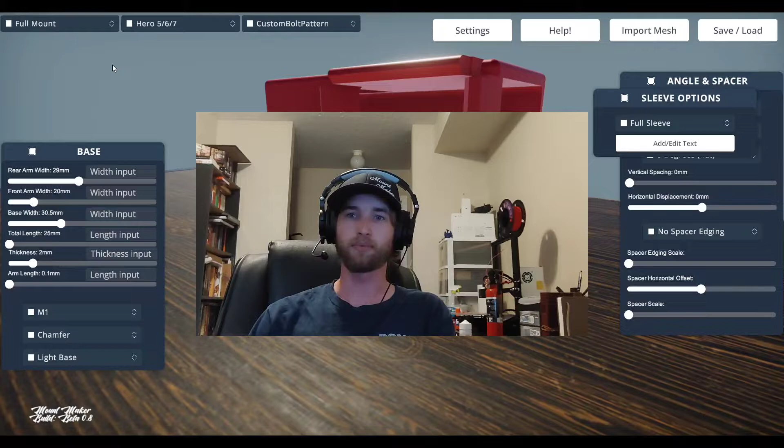We'll start with the small stuff and work our way through the list of the bigger stuff. I'm going to make a more in-depth tutorial video as well to go along with this for a couple of the features, but we'll talk about that in a minute. Starting from the small stuff.

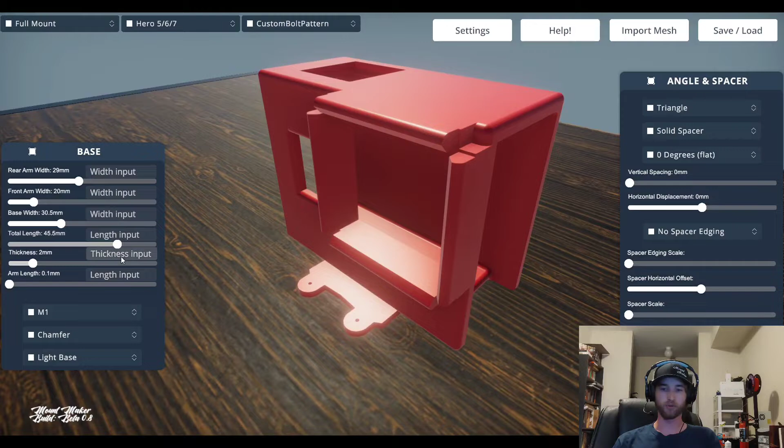Alright, I know a couple of you run some rather large quads and you were asking for M4 bolts. So M4 is now an option. They are massive, but it's an option now.

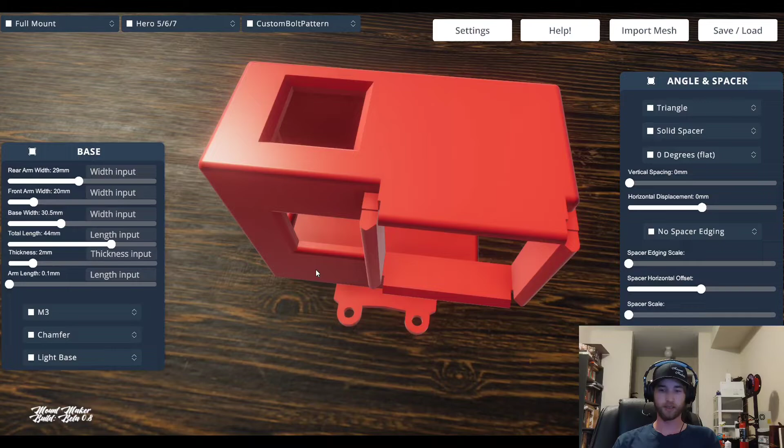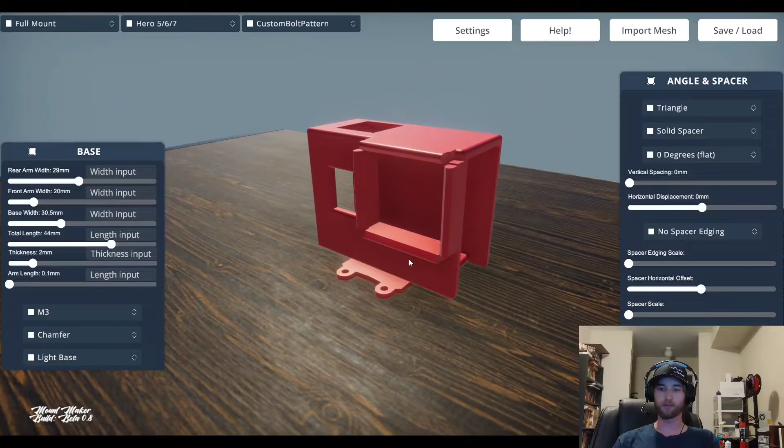Cameras. I know the camera was getting kind of annoying for some of you. I have plans in the future to further fix this and streamline it, but for now, I've turned off collision checking for it. That means it won't clip inside the mount when you're scrolling by and zoom in real stupid like. The downside is it also doesn't check for collisions under the table. So it's a bit of a trade-off, but the way I see it, if you're going this low, you probably don't care if it goes under anyway.

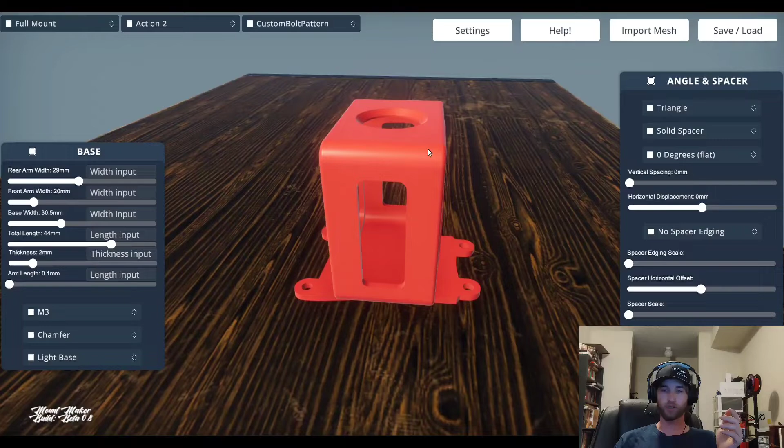Alright, I fixed up the DJI Action 2 mount. I know some of you were having issues, especially with the ND filters, where you could see the borders of the mount on screen. That's definitely not ideal, so I went ahead and chopped back the little lens bumper, I guess you could call it. I did this with all of the variants, but the one in question was actually this side mount ND filter one.

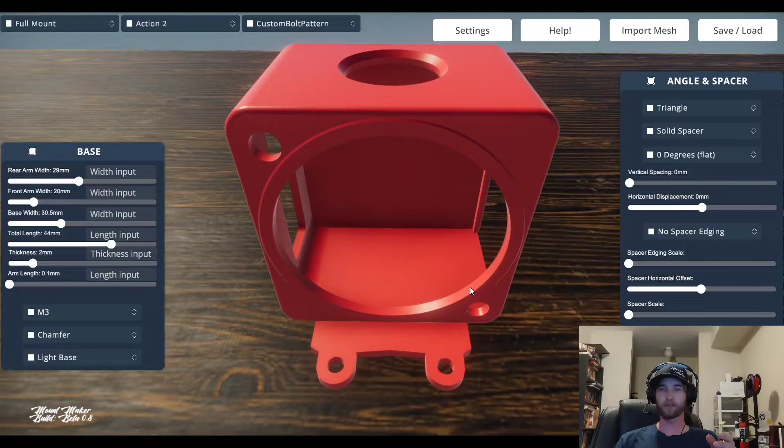So hopefully that fixes the problem. If you guys are still seeing edges of the mount in your camera view, please let me know. Best way to get a hold of me is through Facebook Messenger on the MountMaker page. I'll respond to that, I see it pretty much immediately. Email works pretty good as well, but yeah, let me know if this fixes the issue or not. I hope it does. I'm happy to rework it again if it doesn't.

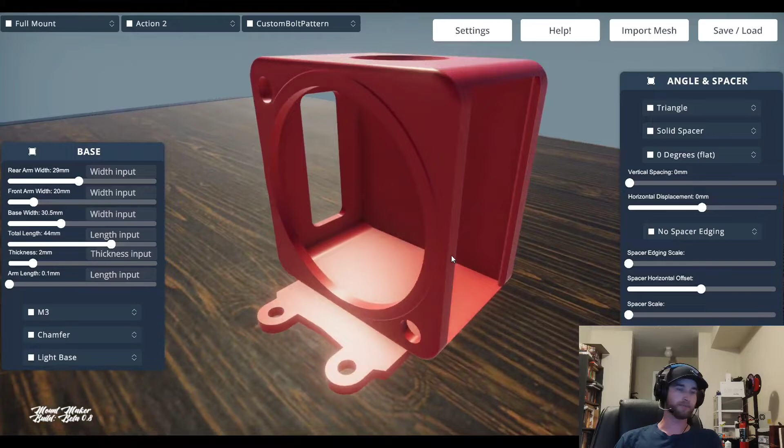Moving on, I started working on the ability to scrub through and change up what we're doing for the bottom mounts there. I'm not fully sure where I'm going to go with that, but I think the ability to have prefabricated mounts, just like prefab cameras, could be quite handy, especially for some of the really weird drones out there, like the Cinerace 20, which has a mount that's basically impossible to make in this. I'll get to a solution for that soon as well.

But for the meantime, I started working on a menu system that I've had a placeholder for a while. The only one I've added so far is the DJI FPV base. So there you have it, this will work with the DJI FPV.

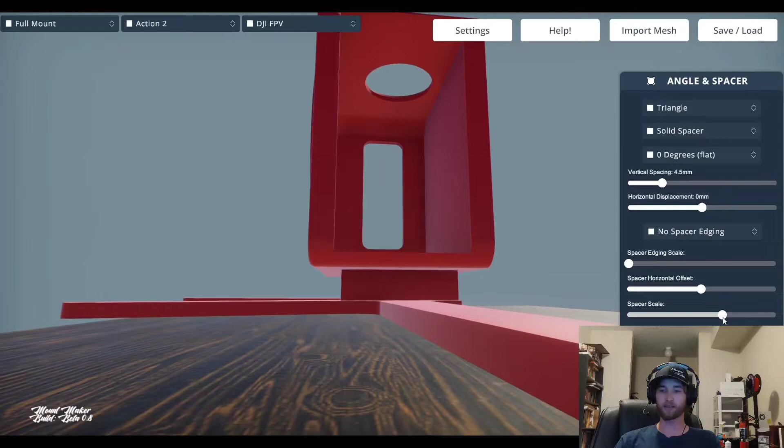It's not too complicated. It takes away a lot of your choices when it comes to what you're going to do with the base, but that's because it's prefabbed. Now you can still change the spacer scale, you can change everything about what happens above the base, but the width and the maximum length are going to be preset on these. But of course you still have all your options. You could throw whatever the heck you want on your DJI FPV now, for example.

Moving on, I have added soft mounting. Now I know this was something that you guys had been asking for a while. By the way, thickness will reset down to 0, I'll work on digging that bug out, but if it looks like this, you just move the thickness up.

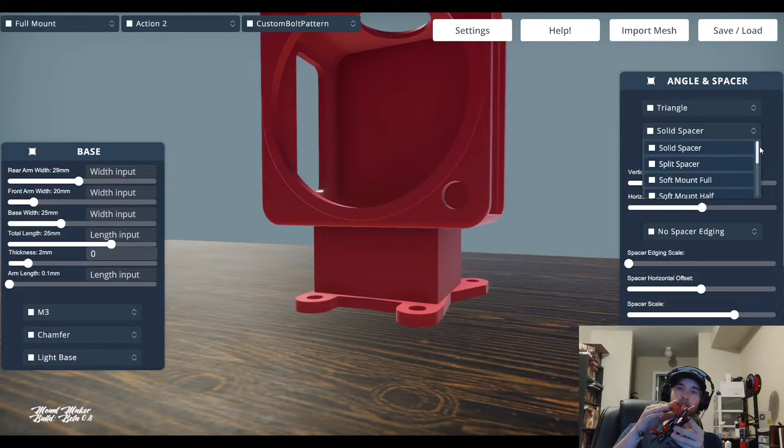Anyway, so soft mounts, you guys have been asking for it for a while. I've gone ahead and got a bit of a rudimentary sort of way of doing it so far. It should do the trick though. I was actually testing it this weekend on a cheap little RunCam Thumb, but it's got enough wobble in it that it dampens the vibrations. I find with 95A, it's still stiff enough that you're not getting crazy jello going on. So far so good. Obviously with heavier cameras, I'm going to need other people to test them for me, see how it all goes. But to show you, it's going to be in the spacer menu.

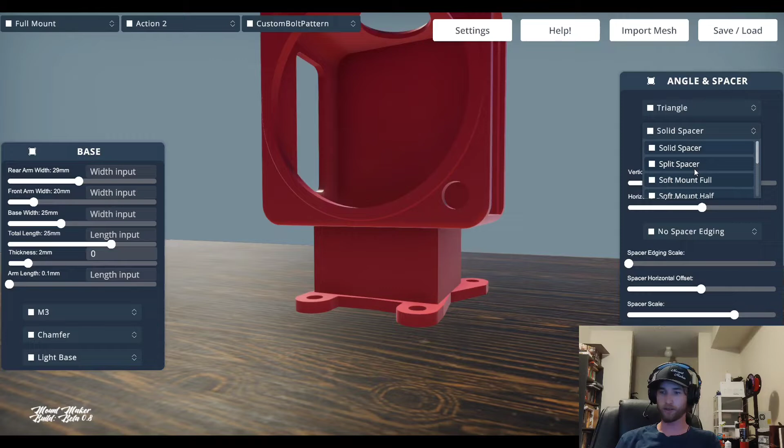You get your standard solid and split, but now I've gone ahead and we got soft mounts. These can be tweaked quite highly with the spacer settings.

So you can squeeze them in, pull them out, you know, all your typical fun stuff.

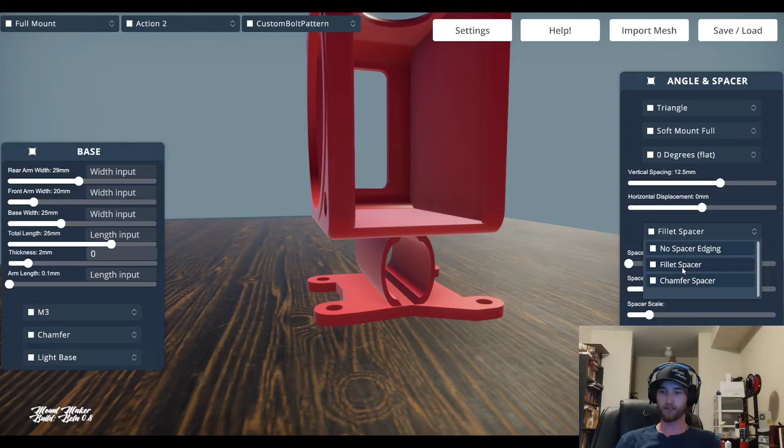If you add edging, you can add edging. I wouldn't recommend it, but it does exactly what you'd expect - it adds edging to the outside of it, or it used to. Maybe not now, just because of the size. But oh, scale, duh - so yeah, that will happen. Not ideal, but it's easy enough to just turn it off.

So I have a few options for this. Just going through them really quickly - I got full length ones, not sure how these are going to do, but I added them just as an option. We got half size, which is what I think most of us are probably going to use for soft mounting. And of course, yeah, you can squish them down.

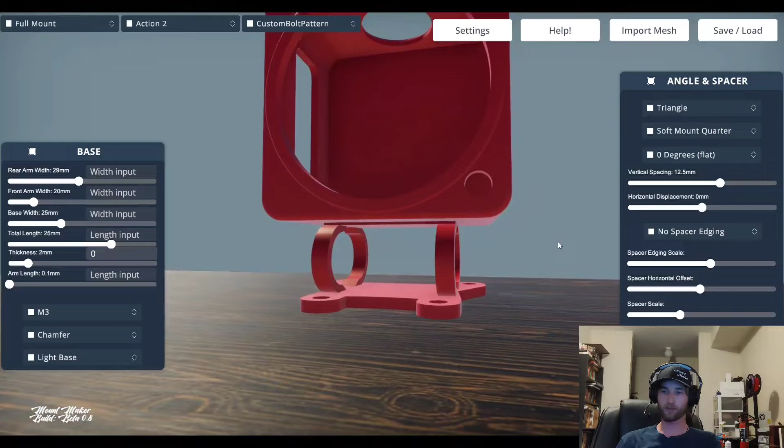Soft mount half, soft mount quarter. I added these ones for when your base width is going to be really large, because it scales based off of base width. It just gives us a few extra options. I'm not sure anybody's going to want rings that thin at a small base width, but the option is there, especially for the smaller stuff like the Runcam Thumb and the Insta360.

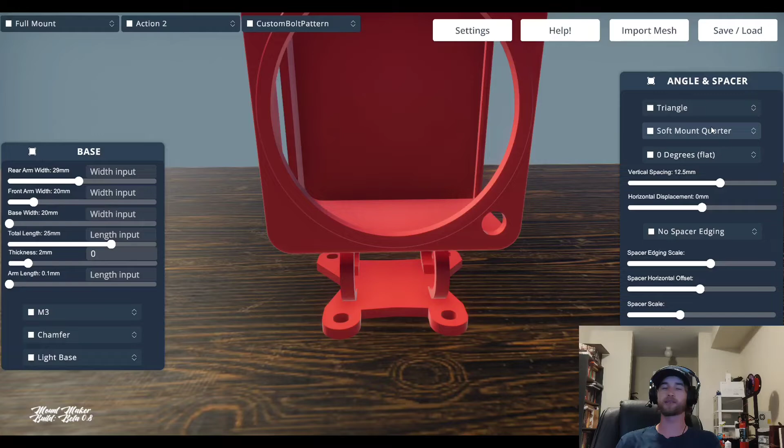I also added some thick ones. These have a really thick center in them - they'll probably print a lot easier. I got thick full and thick half. Yeah, it's there as an option - it's whatever works best for your situation kind of thing.

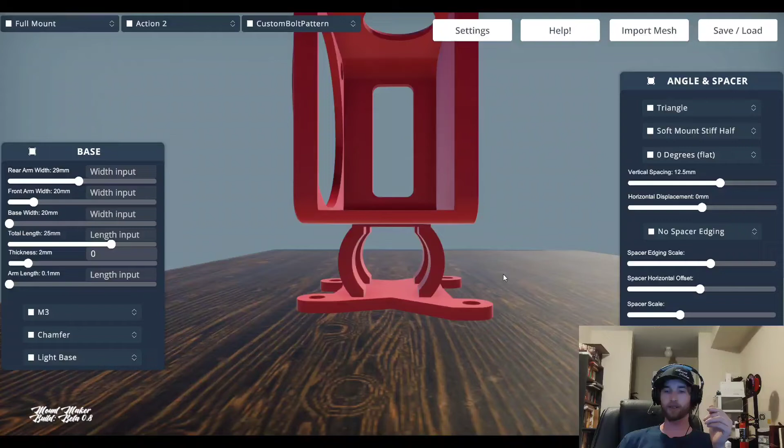And I also added stiff - oh, there's thick, these are stiff. So stiff mounts or stiff spacers are going to have less of a curve on them. It's all pretty experimental for me right now, because I don't do a lot of ReelSteady work or anything like that, so I'm relying on feedback - need to know which ones really work the best. I'll probably keep them all in, because every camera is a little bit different and the amount of vibration you get through each drone is going to be different. So it's really use-based, based on what you need it for kind of thing. But these ones are probably going to be quite helpful in certain applications.

So, soft mounts - moving on.

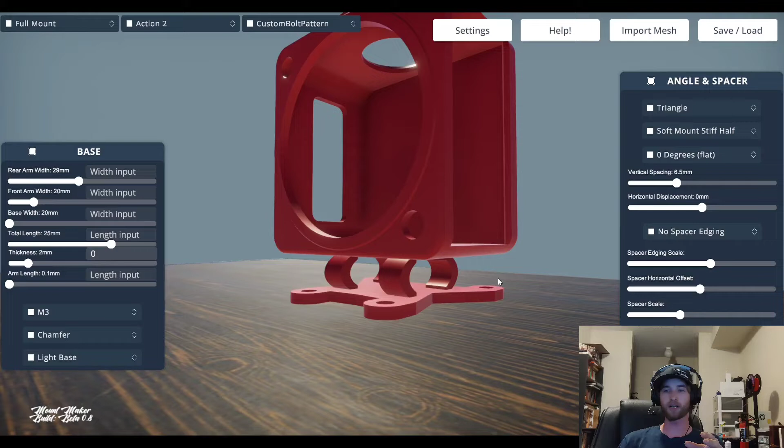The two biggest things I've done for this update, and they might not seem huge on the outside, but the amount of code work that went into them has taken me a month at least for some of this stuff, and I'm quite happy about it. It's been the most complicated bit of coding I've ever done, and that is this save load button.

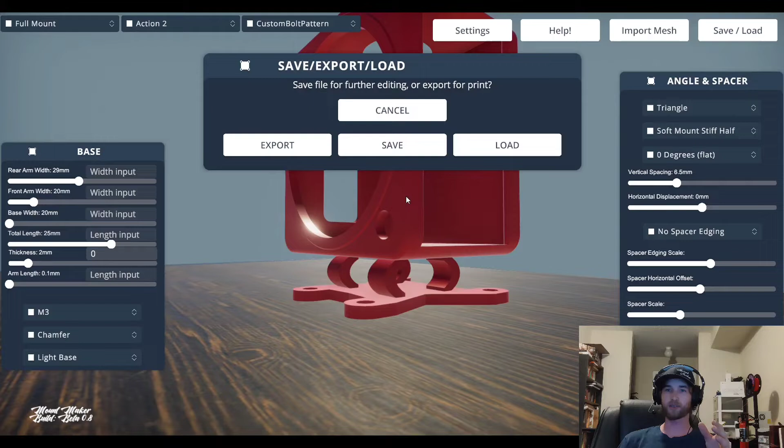So we now have full saving ability in MountMaker, and it's not just saving to your system or saving internally - it's saving to a .mnt file that I just made up. This file is shareable just like any STL file or 3D file. It doesn't matter whose MountMaker system this is. It means we can now share mounts between each other without having to export them, which means people can take a setting like a preset and share that. And I have absolutely no problem with these files being shared - it's why I made it. But with the exported files, it's a bit of a different story - those ones should be just for the user.

So this is a good kind of workaround, but also for us when we've got one drone with a bunch of different cameras that we're cycling through or making different mounts, experimenting - it's nice to have the ability to just save your presets. So it's in where the old export button was. It now has three options: export, save, and load.

For saving, it's pretty simple - save it. I've done this way too many times, I think I'm on save test 21. Save test 21 it is. Hit save.

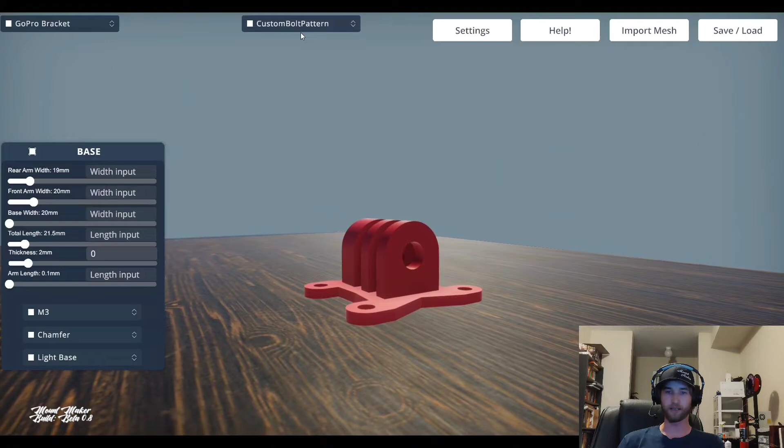Done - it's in your system. You can share it, you can move it around, do whatever. If you go ahead and tweak all this, I'll change the mode over to GoPro bracket or something like that. You can go back in here. It also doesn't rely on the program being open - it's a proper save system. Hit load, and any MNT file will work. So, save test 21 - load that up. And here you go, get your mount back with all your settings saved.

Now this extends all the way to imported meshes too, to the point where you don't actually need the mesh that you imported, the original .obj file - you don't need that.

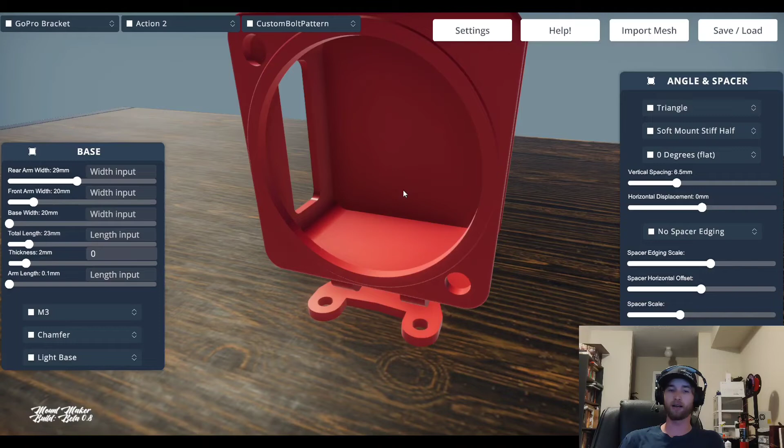So you can import a mesh into MountMaker, tweak it, have it the way you want it, save it, and come back to that specific mesh for further editing, putting it on a different drone, that kind of thing. This means you only have to import something once, and importing being the most finicky part about this, I'm hoping that adds a little bit of convenience.

Now, talking about importing, that's the last thing I have here. I've added the ability to import bases. What this means is now you can import both the base and the sleeve and still edit everything in between. I'm hoping this gives us a lot of flexibility, especially for something like the Cinerace 20, because of how impossible that mount would be to make in MountMaker. I'm hoping this is an alternative.

You find somebody else that designed a really oddly specific mount for you, say like the DJI FPV, which MountMaker could not make properly. You can import that, and you can import any sleeve that you want. All you have to do is slice them, right? So it's pretty much the exact same thing as importing sleeves that we've had before.

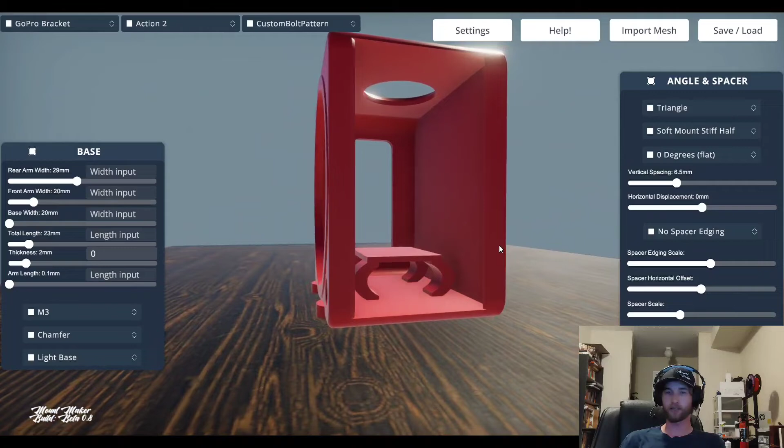So weird sleeve 2. Now I did a terrible job of slicing these, so that's a sleeve. I'm looking for bases. What am I doing? Cancel that. This is a glitch too, a known bug. It's just not updating when you exit out of the mounts. Just move a slider, I'll come back.

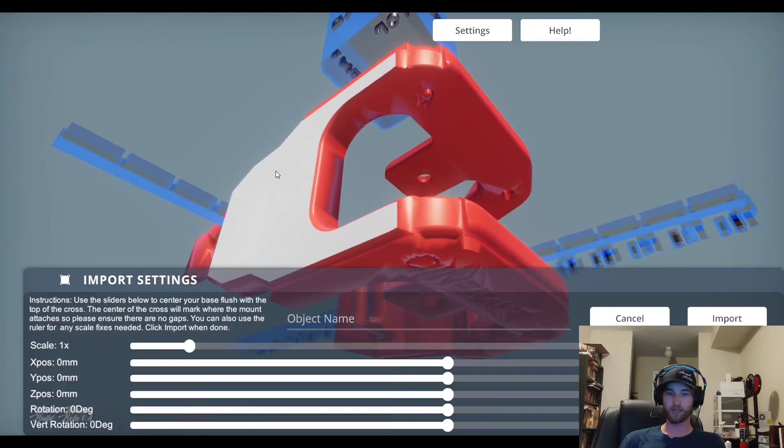Okay, let's try a base. Weird base. Okay, so this is actually for a Cinerace 20. As you can see, there's a bit of an issue with the top of it. The way I sliced it was very poor. That being said, it will still work to show you what's going on here.

It's exactly how the regular imports work, except you want to get this to 90. You want the top of the mount, where the rest of the spacers and everything else is going to align, to be just over top of this ruler here. I'm going to make a more in-depth tutorial about how to do all this to go along with this video. So you just get it kind of like that.

It doesn't matter if it's over a little bit, it does matter if it's under. You can go up with the spacer, but you can't go down, just to simplify things in the code. But you go ahead and center this, rotate it the way you need, get this to 90, center that, bring the Z up to about there.

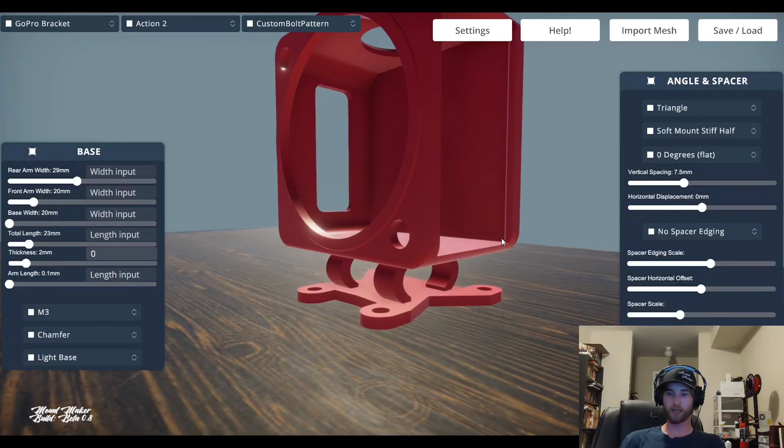The center of the ruler is where the center of the spacer is going to go, so about there. Hit import, and this will work just like any other custom base, like the DJI FPV, except you can go ahead and set this to imported base, and there you go. You have your Cinerace 20.

As you can see, I didn't properly finish clipping this mesh. Make sure that your mesh does not have see-through parts to it. That's going to cause problems in the 3D printer, but that's just the way I sliced it in Meshmixer. You get the idea. So go ahead, you can still change the width of your spacer. It probably helps if it's solid in this scenario.

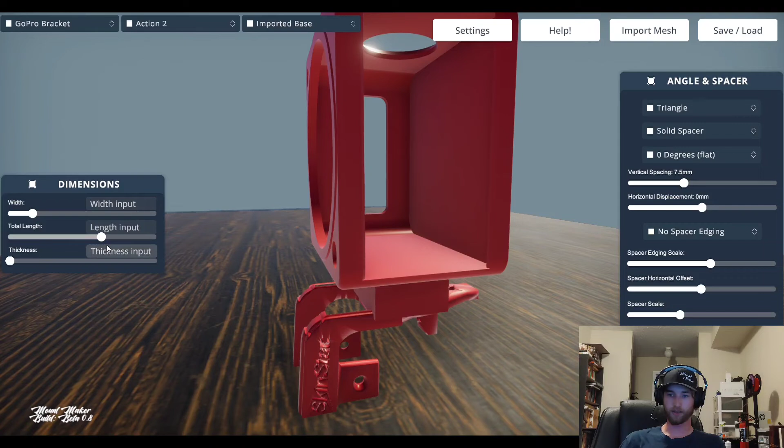Width, length. The length works kind of like the length does on a standard spacer. What that means is you can change the length, but that's not necessarily going to change the width of this space or the length of the spacer. You need to change scale as well. The only reason that's still the case is because if you want edging, you need to do it separately.

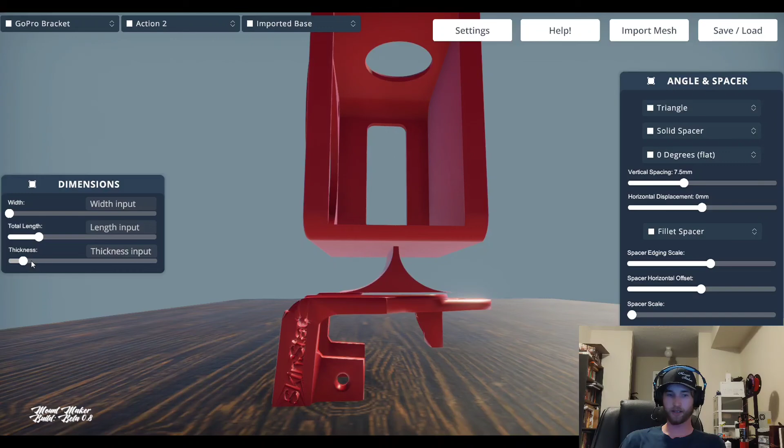Now with some of these mounts, it's going to be a little bit tricky because obviously not everything's meant to work together, like in this scenario. So you do the best you can, cut that down. Thickness will elevate this in case you've got way too much clipping going on. If you don't have enough, you can set it back down to 0. But you get the idea.

And that should about sum everything up. If you got any questions, comments, or suggestions, I'd love to hear them. As always, thanks so much for your continued support with this. I have lots of big things just up the pipeline, and I hope to get another update out pretty soon.